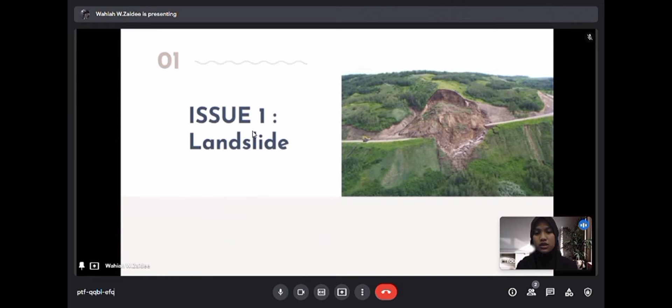So here we start with giving a simple explanation on tropical climate. Then we go to the first issue, landslide. Here we list out the causes of landslide and explain the influence of principle precipitation on landslide.

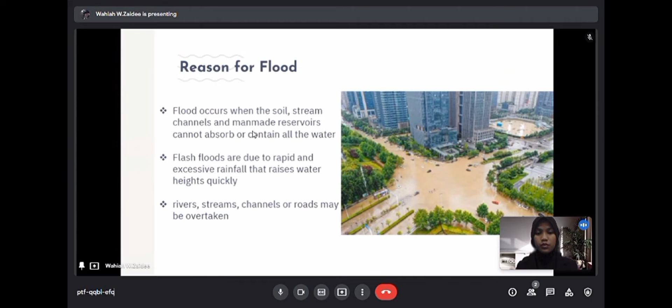The second issue is about great flood, and same as the first issue, we evaluate the reason for the occurrence of great flood in our country and list out places with great potential for flooding, and so on. The last issue is about the effect of tropical climate on building material, whether it is a long-term effect or short-term effect.

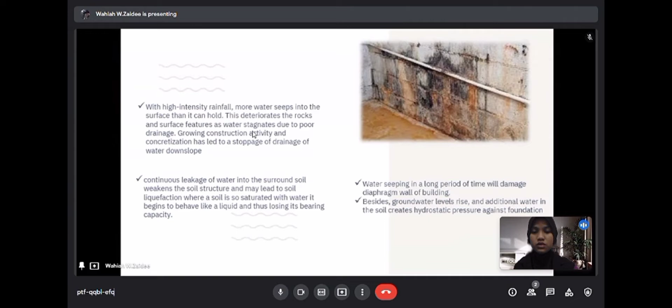So we can see that this assignment is just the simple one compared to the second assignment given to K1S2 students. This assignment is also more open and not too specific, which leads students to develop their own ideas and creativity as well as their own efforts based on the studies. I think that's all from me. I will pass to the second presenter.

In other words, assume the human as a building. Architecture is designing the overall vision of the human, but structural engineering is designing the structure system of the human, such as bone, muscle, and ligaments, to make sure the building does not fall down.

What is the structure system of a building? It is a system that involves securing the components of the system and transferring the load via the members of a cost-effective structure to ensure safety and stability. There are four types of structural systems of the building, such as shell system, load-bearing system, tensile and cable system, and skeleton structure system.

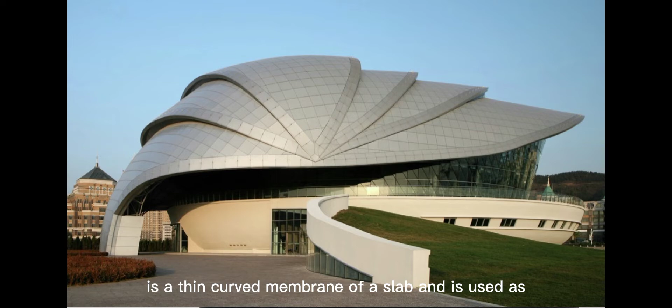First, the shell system is a thin curved membrane or slab used as both structure and covering membrane. They can retain their form and bear loads without the assistance of a frame or solid mass material. This allows for the spanning of large areas without the need for internal support.

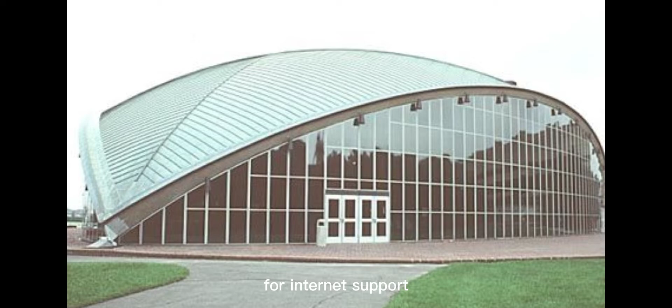Besides, the load is carried vertically downwards through the wall in a load-bearing structure system. The load from the roof and the floor is transferred through the wall, which must then transfer this load as well as weight to the soil. Typically, a load-bearing structure system is used for low-rise residential construction made of masonry.

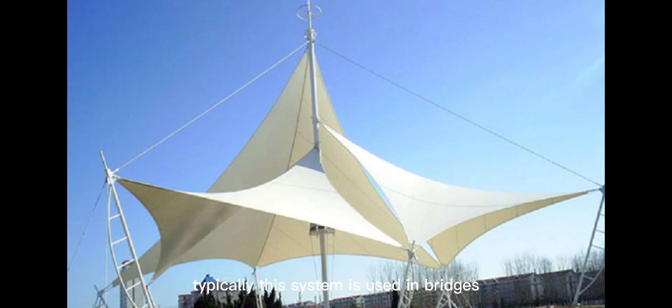After that, the tensile and cable structure is made up exclusively of tension-carrying parts with neither compression nor bending. A cable system is used in long-span construction and is prone to corrosion. Suspension cables are used to support the tensions. Typically, this system is used in bridges.

Lastly is the skeleton structural system. There are four types of skeleton structural systems, such as beam and column system, truss, arch, and frame.

The beam and column system functions as a single unit, transporting the load from the slab to the beam, then to the column, and finally resisting horizontal loads such as earthquake and wind loads. The roof and floor slab are conveyed to the wall or columns via the beams down to the foundations, and finally to the supporting earth.

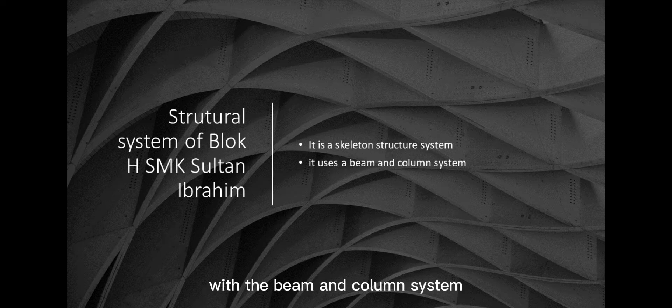The assignment that I have done for structural engineering is on a building which is 3 stories. The building is Blok H of SMK Sultan Ibrahim, and its structural system is the skeleton structural system, with the beam and column system used for the building. This is the architectural drawing and the structural drawing.

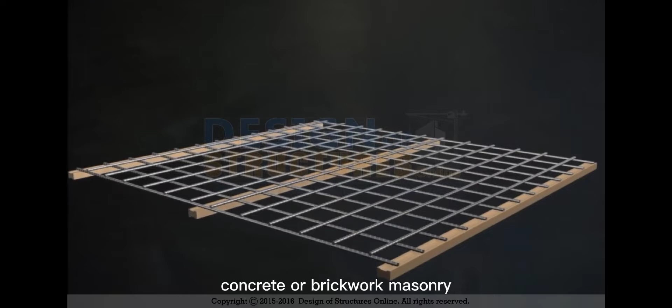Besides, I have learned that the building has 4 basic structural elements: footing, column, slab, and beam. First, the footing is the foundation element of a structure, constructed with concrete or brickwork masonry, and becomes the base to connect the floor columns and floor wall to transfer the weight from the structure to the ground. The main function of the footing is transferring the vertical loads directly to the soil.

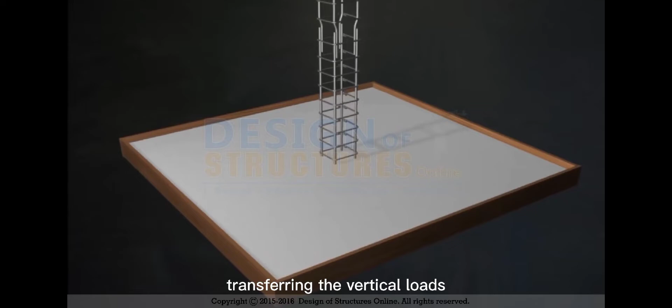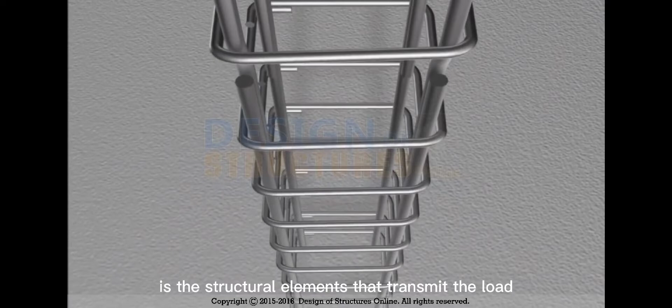Secondly, the column is the compression member. This is because the column in structural engineering is the structural element that transmits the load and weight from the ceiling, roof, slab, and beams to the soil by compression. Generally, the column is made of concrete and steel.

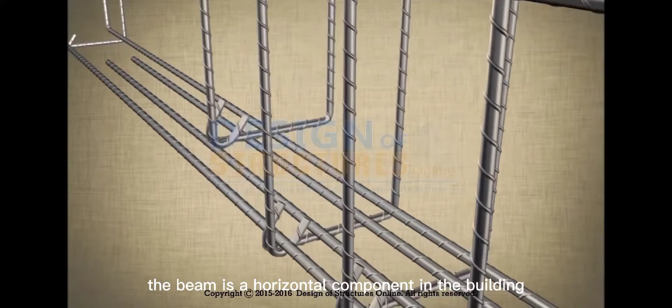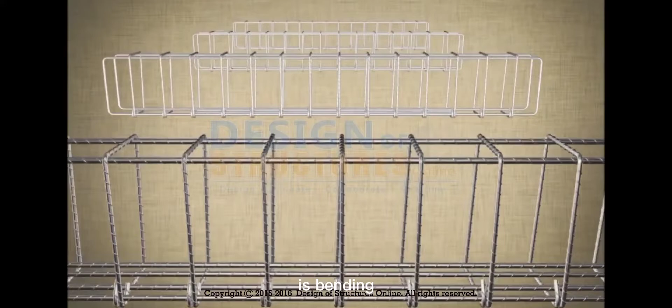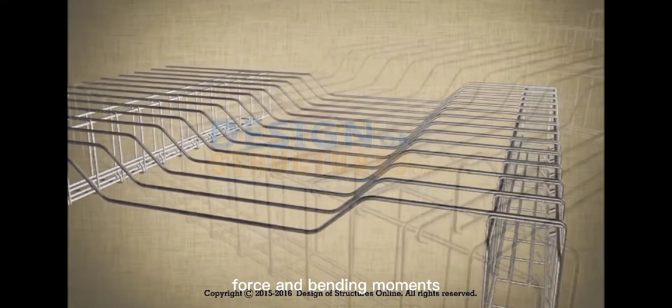Besides, the beam is a horizontal component in the building, a structural element that resists loads applied laterally to the axis of the beam. It primarily deflects by bending. Reaction forces are generated at the beam support points because of the forces acting on the beam, resulting in shear force and bending moments within the beam, which cause internal stress, strain, and deflection in the beam. Beams are distinguished by their support method, profile, equilibrium condition, length, and material.

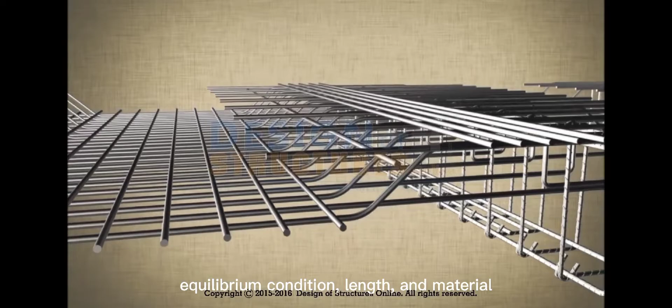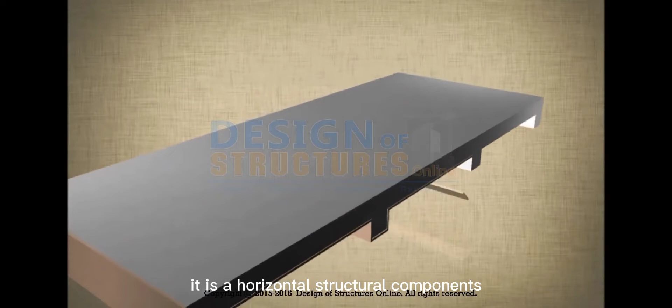Lastly, the slab is a structural element used to produce a flat and functional surface such as floor, roof, and ceiling. It is a horizontal structural component with parallel or nearly parallel top and bottom surfaces. Slabs are commonly supported by beams, concrete or steel columns, walls, or the ground.

In my opinion, structural engineering is not just about designing and structuring the system of the building. Their obligation and responsibility is to protect everyone in the building and make sure they are safe at all times. That's all from me, thank you.

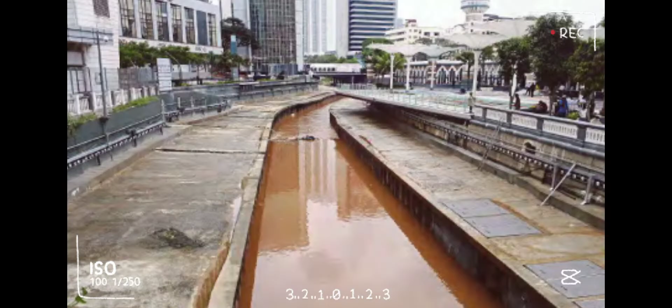Their responsibilities include surface and groundwater systems, preservation and enhancement of the natural river and watershed environment, design and construction of water control facilities, and water conservation. There are two types of water resources systems, namely water control systems and water use systems.

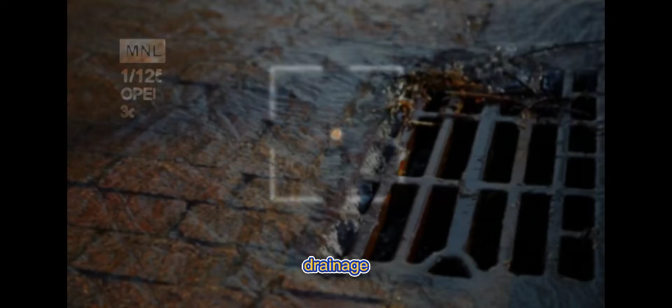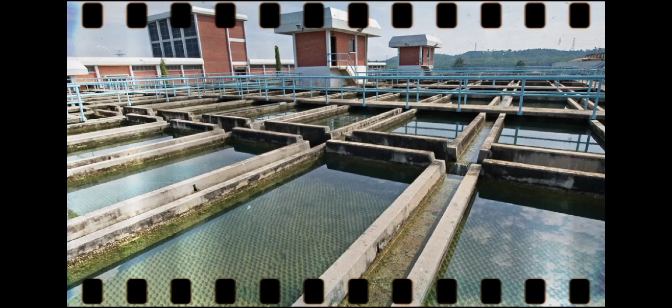To quote some examples, water control systems include drainage, flood protection, water supply, salinity control, sediment control, reducing pollution, as well as ship navigation.

On the other hand, water use systems include water distribution, wastewater treatment, wastewater collection, irrigation, and hydroelectric power systems. A water resources engineer must also have knowledge of global water resources, the hydrological cycle, and watersheds. In terms of global water resources, the Earth has about 1.3 billion cubic kilometers of water, of which 97.5% is salt water and the remaining 2.5% is fresh water.

In addition, water resources engineers have to know and understand the process of the hydrological cycle, such as transpiration, precipitation, infiltration, evaporation, condensation, and so on.

Furthermore, they also need to know the meaning and types of watershed. As we all know, a watershed is an area of land that directs rainfall and snowmelt to creeks, streams, and rivers, and finally to end points such as bays, oceans, and reservoirs. There are two types of watershed: natural watershed and developed watershed, both of which are closely related to the water cycle.

Finally, as a water resources engineer, learning coastal engineering is also a must. In coastal engineering, we learn how to distinguish coastal zones, understand coastal hydrodynamics, and know the formation of coastal erosion and its protection strategies.

For instance, coastal erosion protection strategies include construction of seawalls and revetments. In addition, beach nourishment is also a vital strategy.

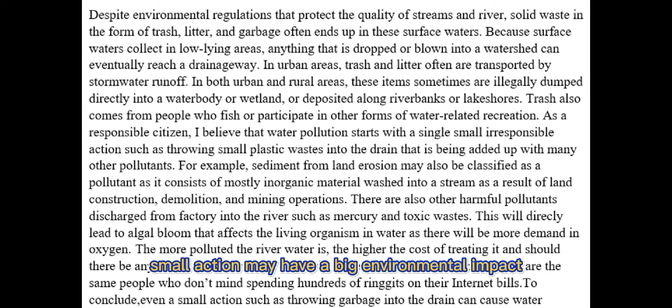The first question is: in a water-related system, discuss how a single small action may have a big environmental impact, and provide an example. The second question asks students to provide one example of a problem in a watershed caused by human activity and suggest how to minimize and eliminate it.

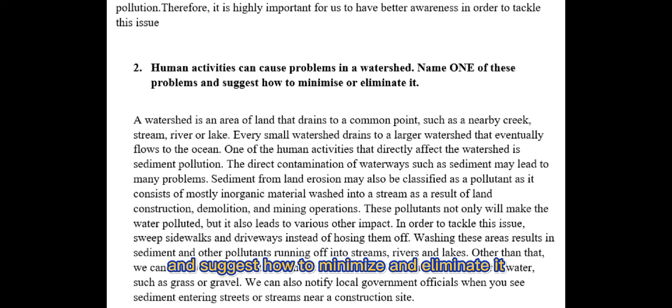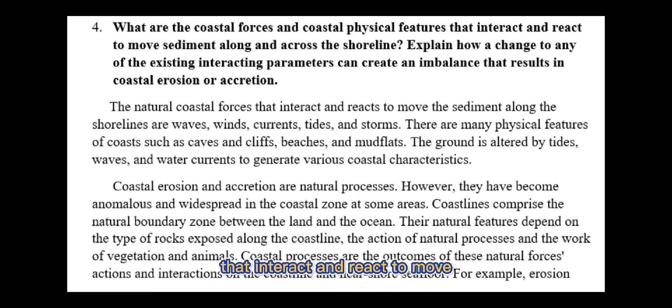The third question asks students to think about the expertise involved based on the statement given and briefly describe each of their roles. The next question is: what are the coastal forces and coastal physical features that interact and react to move sediment along and across the shoreline?

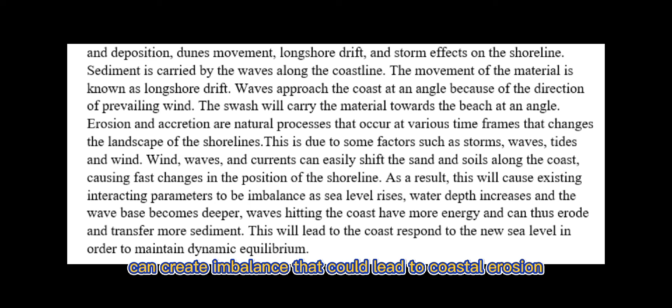And explain how a change in any existing interacting parameter can create an imbalance that could lead to coastal erosion and accretion. The last question asks students to suggest how the Malaysian public can help to reduce and mitigate water-related problems.

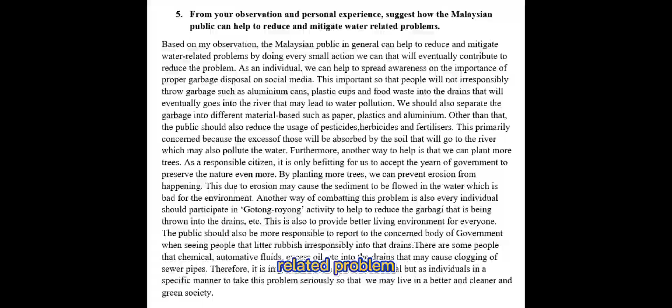Today I am going to explain what we have done for our assignments and what we have learned regarding environmental engineering. What is environmental engineering? It is about global warming, environmental impact, environmental sustainability, environmental management, and others.

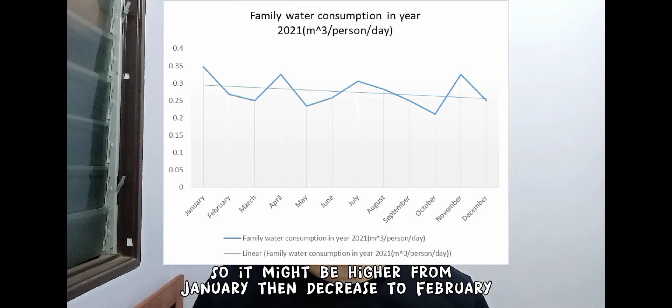It might be slightly different for each family about water consumption in a day. So it might be higher in January, then decrease in February, and decrease in March, and increase back in April. It depends on how we use water in a day.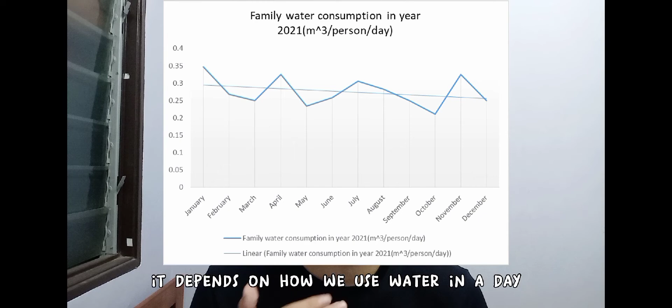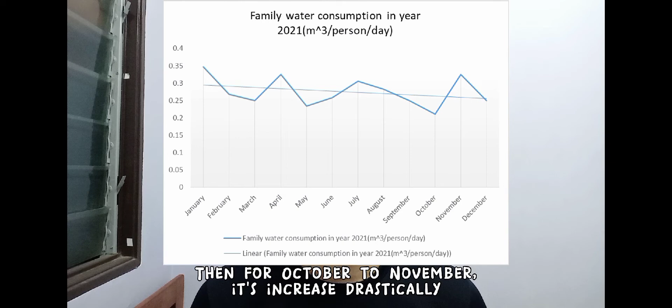Like we see, from July to October, it decreases continuously from each month to the next. Then from October to November it increases drastically, and then drops in December. Okay, that's all for question 1.

For question 2, we need to determine how much water we use for shower, laundry, and cooking. Approximately, my family will use about 403 volume units of water for shower, laundry, and cooking in a year, for 2021.

Therefore, I will use about 100.75 volume units of water in the year. That's all for question 2.

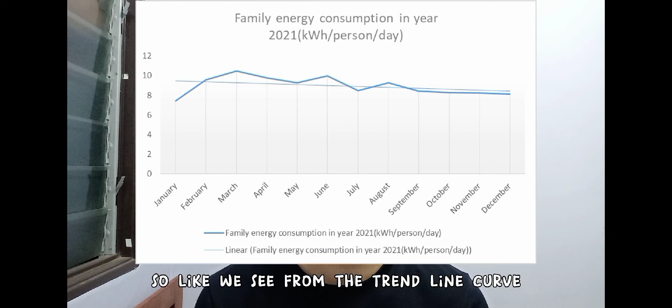Okay, for question 3, it asks again to produce a trend line curve showing our family's energy consumption for year 2021. So as we see from the trend line curve, there isn't a huge difference between each month. From August to December, there's a slight difference, decreasing in those months. Okay, that's all for question 3.